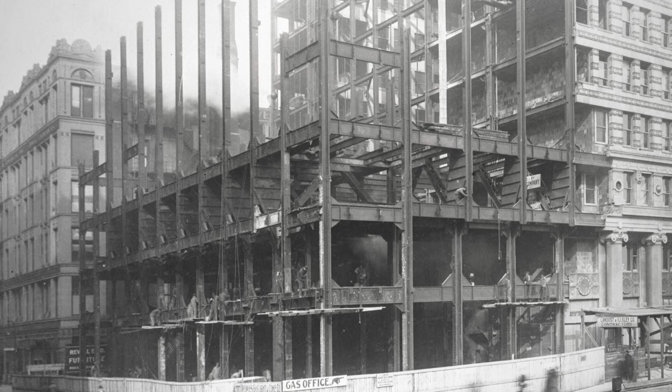The common explanation is simple. They were either lucky or massively overbuilt. But when you look closer at the heavy masonry, the riveted joints, the redundant steel frames, something far more ingenious emerges. A forgotten secret baked into every beam and rivet by builders who had no seismic codes, no computer models, and no shake tables, only instinct. And that instinct may have outsmarted a century of modern optimization.

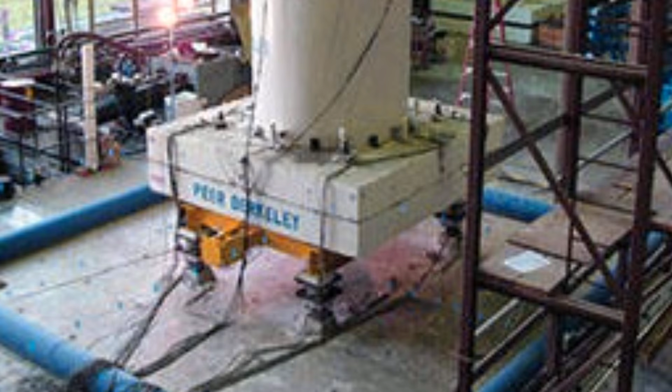In the days after the 1906 San Francisco earthquake, newspapers rushed to explain how steel towers like the Call Building had survived when so much of the city lay in ruins. Headlines called them oversized marvels and debated whether their survival was pure luck or the result of extravagant overbuilding. The press painted a picture of buildings so stuffed with steel and brick that they simply refused to fall, as if brute force alone had saved them.

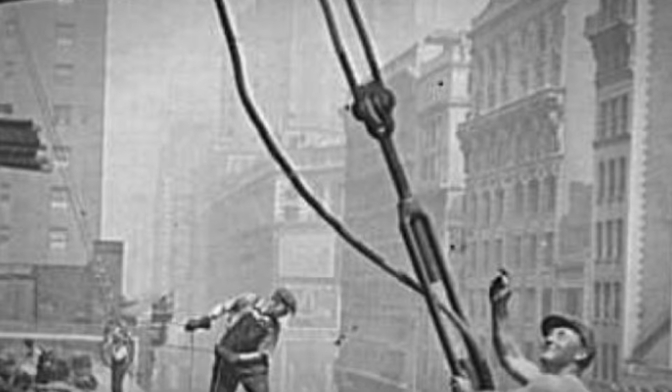Critics like John B. Hayward, a respected engineer of the era, pushed back. In a widely read column, Hayward questioned the wisdom of surrounding steel frames with what he called excessive masonry, warning that such extravagance might be more about show than safety. He argued that construction budgets were swollen by material that did little to guarantee survival. The public, caught between awe and skepticism, wondered if these towers had simply gotten lucky.

But beneath the headlines and heated debates, something more subtle was happening. Builders of the time worked without seismic codes, shake table tests, or even a clear understanding of how earthquakes truly affected tall structures. Their work was guided by observation, experience, and a kind of engineering instinct, an instinct shaped by the disasters and near misses that came before.

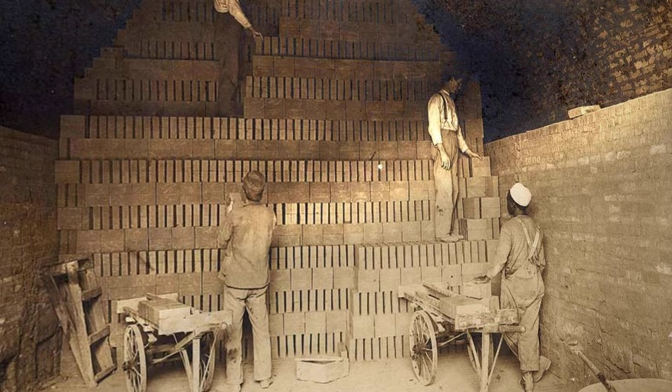Massive steel frames, thick masonry cladding, and deeply rooted foundations were not calculated for earthquakes in the modern sense. They were the product of a mindset that valued patience, excess, and a respect for forces no one could fully measure. This approach, criticized as wasteful by some, ended up providing hidden resilience.

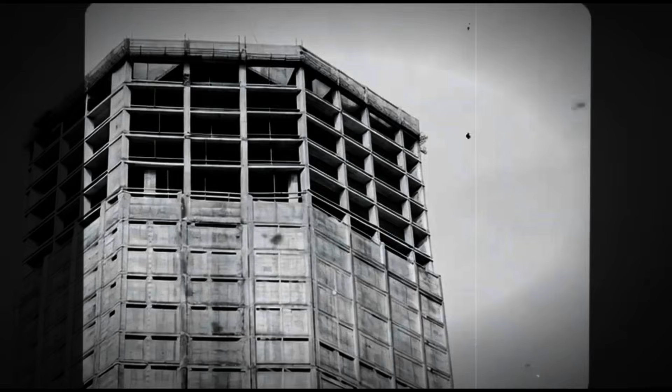The story of these early skyscrapers is not a simple tale of luck or reckless overbuilding. It is a story of builders who, lacking precise science, built with a margin for the unknown. Their choices, often questioned at the time, left behind structures that outlasted the odds. Looking up at these old steel-framed towers today, it's worth asking whether their survival was really an accident, or whether the secret lies in a kind of wisdom that modern engineering sometimes forgets. This wisdom remains a lesson for today.

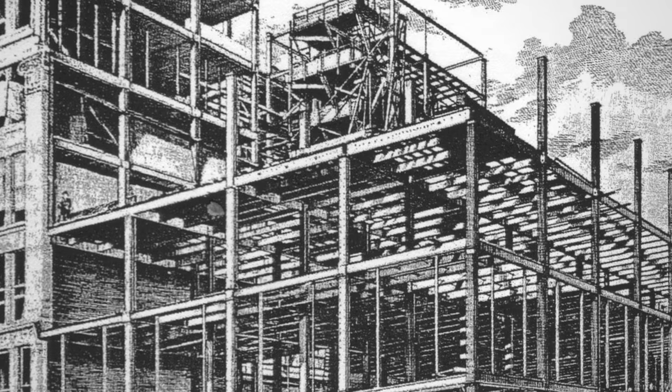Chicago in the 1880s was a city in a hurry, its skyline rising almost as fast as its ambitions. Into this whirlwind stepped William LeBaron Jenney, an engineer with a head full of sketches and a belief that steel could lift a building skyward without weighing it down. In 1885, his Home Insurance Building became the first true metal skeleton, a 10-story experiment that combined rolled steel columns and beams into a frame that carried all the weight, freeing the walls to become mere curtains.

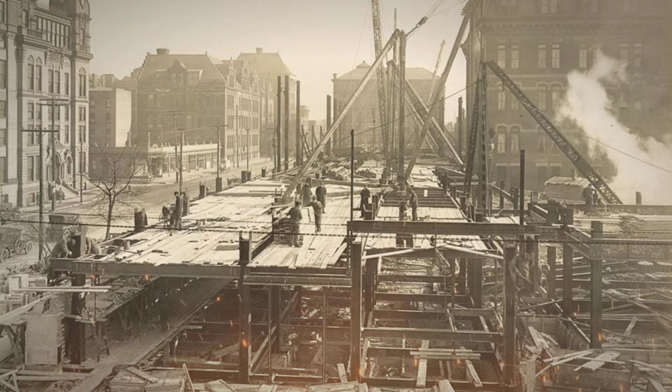Jenney's design notebooks from those years are filled with calculations and rough diagrams, but what stands out is the confidence to try something no one else had dared. The appetite for height caught fire. By the turn of the century, San Francisco was racing to catch up, determined not to be outdone by the Midwest. Between 1898 and 1902, the city saw more than 30 steel-framed projects break ground, each taller and more daring than the last. The rivalry wasn't just about civic pride. It was about who could master the new material, who could build faster, higher, and with more flair.

Every new tower was a gamble. No seismic codes, no wind load formulas. Just the judgment of engineers and the lessons of past failures. Construction moved at a pace that would be unthinkable today. Crews worked around the clock, hoisting beams into place with steam-powered derricks, riveting connections by hand, and wrapping the frames in thick layers of brick or terracotta. The cost of steel and labor soared, but so did the demand for ever taller office blocks and hotels.

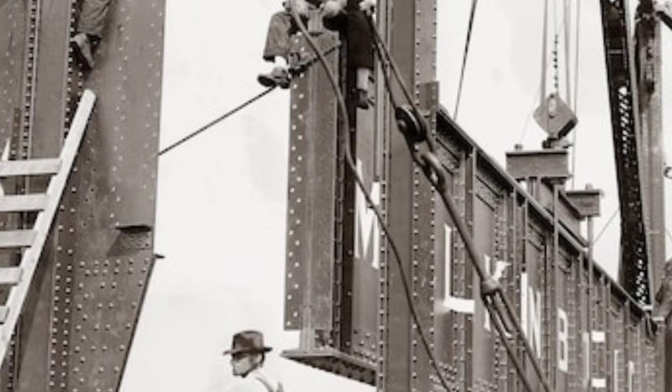Material choices were shaped as much by economic cycles as by engineering logic. When steel prices dipped, frames grew heavier. When budgets tightened, corners were cut. Yet even in this fevered environment, builders tended to err on the side of excess. Without formal codes to guide them, they relied on overbuilding, sometimes out of caution, sometimes out of showmanship. The result was a skyline that was both a monument to optimism and a laboratory for structural ideas that would take decades to fully understand.

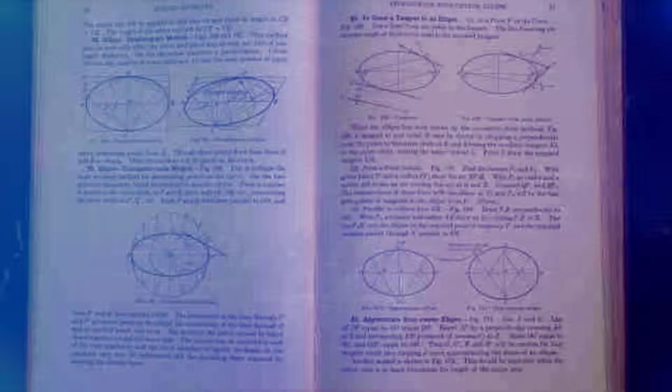Manuals from the 1890s offered little guidance for earthquakes. Calculations for wind and gravity loads filled the pages, but seismic forces were left to the imagination. Engineers in Chicago and San Francisco worked in a world where the only certainty was uncertainty. There were no formulas to follow, no tables to consult, and no building code to enforce minimum safety against shaking.

The first seismic ordinance in the United States did not appear until 1908 in San Francisco, 2 years after the city's devastating quake. Even then, the code was a single paragraph, requiring only a rough estimate of lateral force based on building weight. It would be another 23 years before the first large-scale shake table experiments at Berkeley in 1931 provided any kind of scientific feedback on how steel frames actually behaved during an earthquake.

In practice, every decision came down to experience and a kind of professional instinct. The people who built these towers had only their eyes, their hands, and the lessons of the past to guide them. Iron workers listened for the right ring of a rivet head. Foremen watched for hairline cracks in fresh brickwork after minor tremors. If a building settled unevenly, they recorded it in field notes and tried something different on the next project.

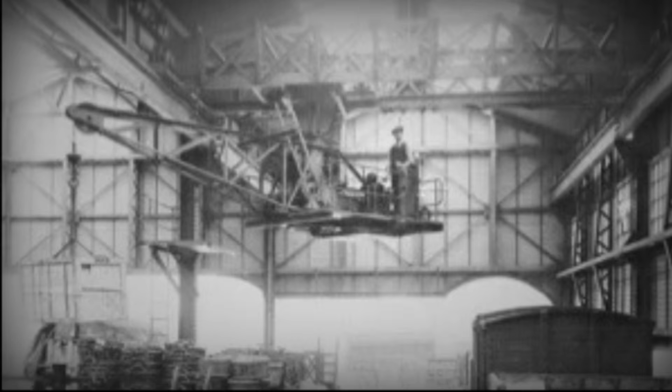The absence of formal standards meant that each engineer became his own authority, drawing on a blend of caution and bravado. Some responded to uncertainty by adding more steel, more masonry, or deeper foundations than the numbers strictly required. Others trusted the skill of their crews to improvise solutions on the fly.

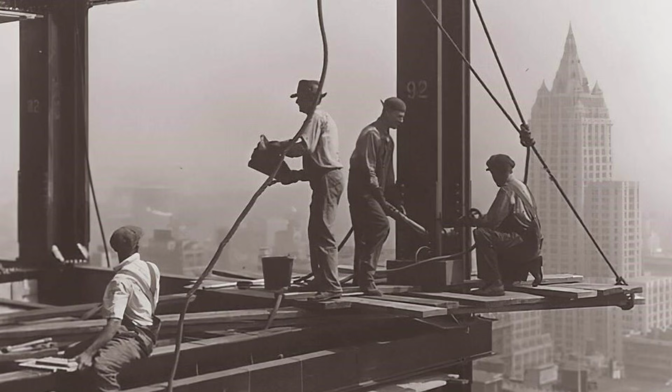This era of guesswork and overbuilding may seem reckless by modern standards, but it produced structures with a built-in margin for the unknown. The resilience of early skyscrapers was not the result of precise calculation, but of a mindset that accepted what could not be measured. Only later would science catch up, codifying what builders had learned by feel. Looking back, it is clear that the survival of these towers was less about luck and more about a quiet, persistent respect for forces no one could fully predict.

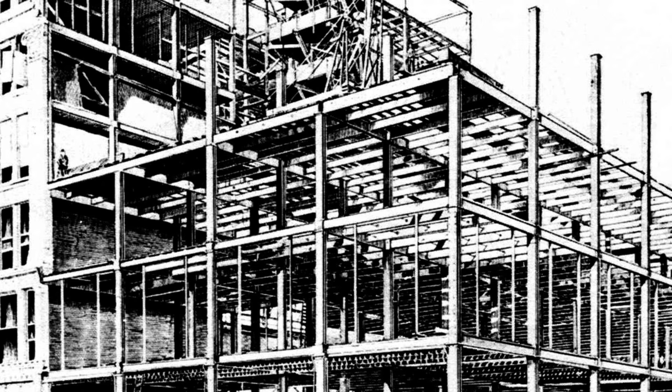23 cubic feet of limestone per floor: by modern standards, that sounds like extravagance. Yet for the builders who wrapped Chicago's and San Francisco's earliest steel skeletons in thick layers of stone and brick, this was simply how things were done. The heavy cladding, often ridiculed as unnecessary weight, played a role few at the time could have articulated. It acted as a kind of silent partner in the building's survival during an earthquake.

Masonry cladding was not chosen for its seismic performance. Fireproofing and civic pride drove the decision. Stone and brick gave these new towers a sense of permanence and grandeur that steel alone could not provide. But when the ground shook, that very mass became an unexpected asset. The thick walls, anchored to the steel frame with flexible shelf angles and iron ties, moved just out of phase with the skeleton behind them.

As the quake's energy raced through the city, the masonry lagged slightly behind the steel, absorbing and diffusing the shock. Each brick and stone, tightly packed yet able to slide microscopically, helped to dampen the building's sway. This was not the brittle, monolithic masonry of old. Instead, it was a layered system, steel for strength, masonry for mass, joined together by fastenings that allowed just enough give.

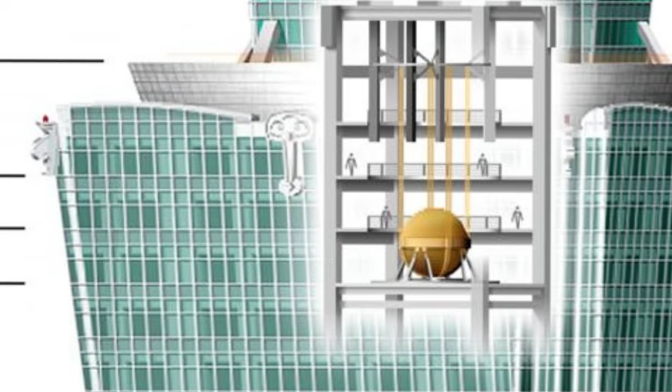Contemporary ledgers for the Call Building and Mutual Savings Bank record staggering quantities of cladding, 30 cubic feet of brick per floor, 2 million pounds of granite and terracotta on the Board of Trade. These numbers, dismissed as architectural showmanship by critics like John B. Hayward, now reveal a hidden logic. The inertia of the cladding increased the building's response time to violent shaking. Laboratory tests a century later would confirm what builders only sensed.

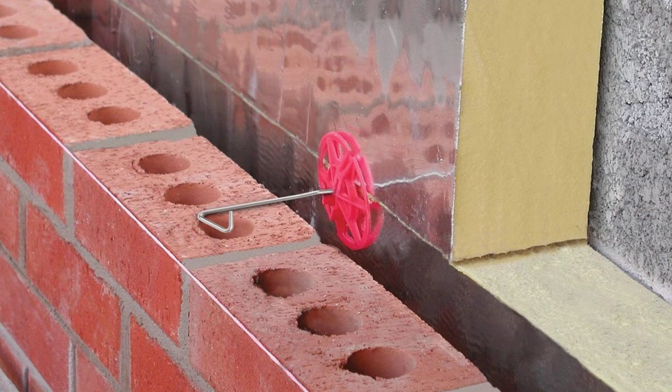When properly anchored, heavy masonry acts as a damper, bleeding off energy that might otherwise tear the frame apart. The method of attachment mattered just as much as the material. Iron shelf angles bolted to the steel beams supported the weight of the stone and allowed it to move independently in small increments. Flexible ties, often spaced every few feet, kept the veneer from peeling away but did not force it to act as a rigid shell.

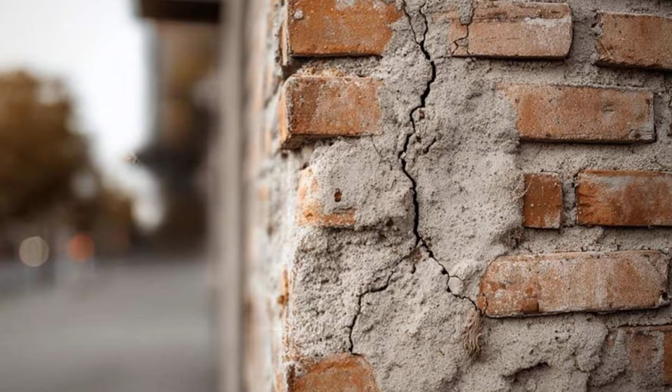This subtle separation allowed the facade to crack and absorb energy without transmitting the full force of the quake to the skeleton inside. Period manuals describe the practice as a way to relieve settlement stresses, but in practice, it introduced a form of controlled flexibility that modern engineers would later recognize as essential for seismic damping.

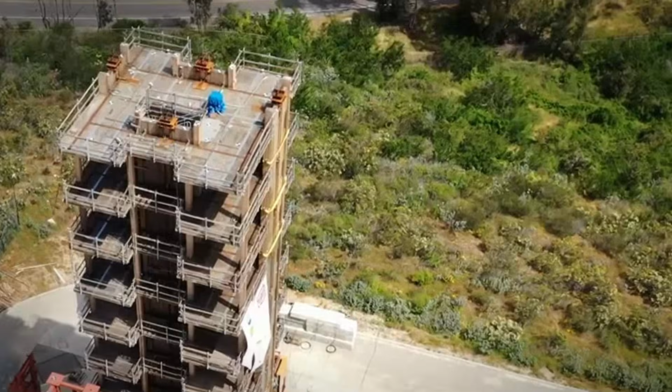The concept of damping, reducing the amplitude of vibration, was not part of the engineering vocabulary in 1906. Yet the combination of mass and movement in these early towers achieved exactly that. The cladding's inertia, coupled with its flexible fastening, created a first line of defense against unpredictable forces. Modern seismic design now uses tuned mass dampers, pendulums, and viscous couplings to accomplish what those early builders achieved with limestone and brick.

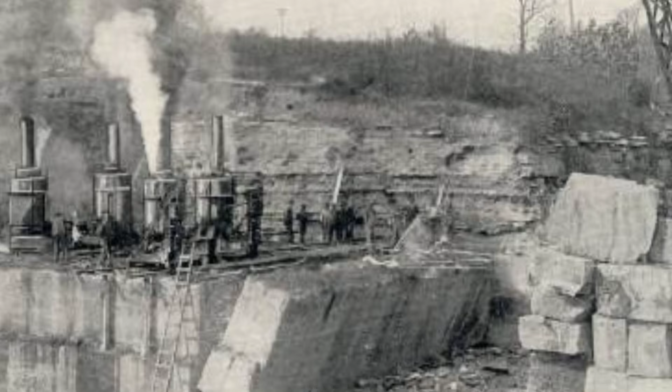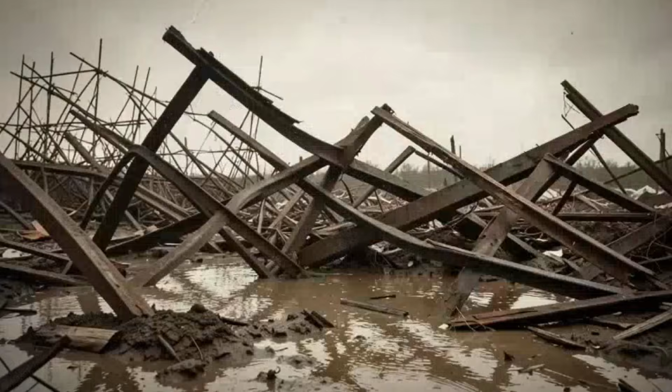Their survival reminds us that sometimes what seems like overbuilding is really an unspoken respect for the unknown, expressed in stone, steel, and the patient craft of those who refuse to take chances with the forces they could not see.

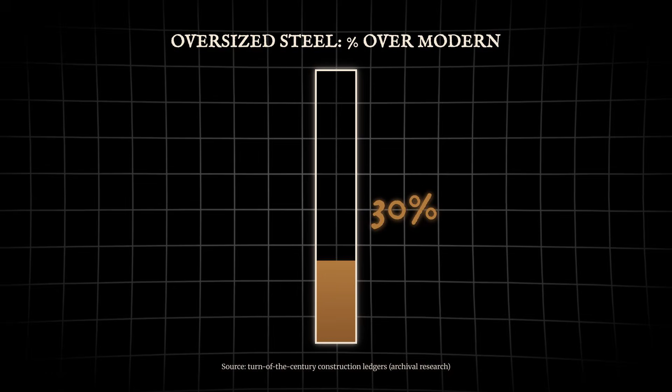Steel was the currency of confidence in the early age of skyscrapers. When George A. Fuller's company took on the Call building in San Francisco, they ordered more than 11,200 tons of steel for a structure that, by modern standards, could have stood with nearly a third less. This was not an isolated case. Across Chicago and the West Coast, ledgers from the turn of the century show steel frames routinely oversized by 30% or more compared to what today's codes would require.

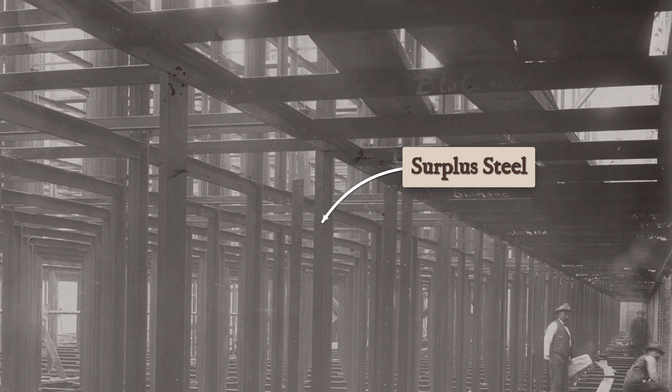At first glance, this seems like architectural bravado or financial waste, a race to outbuild rivals with sheer mass. But the numbers tell a subtler story. Within each floor of the Call building, a dense lattice of beams and columns formed a continuous grid. The pattern was not just for show. Every joint, every splice, every redundant member created a safety net.

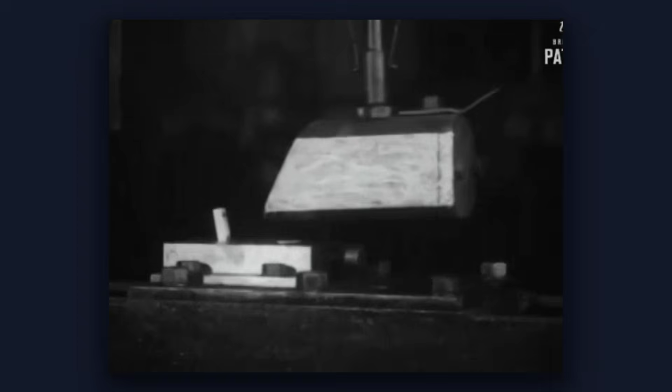If a column or beam gave way, whether from fire, earthquake, or human error, the surrounding frame could reroute the load through alternate paths. Modern engineers call this redundancy. In practice, it meant that no single failure could bring the whole tower down. Fuller's own construction memos, saved in company archives, reveal a philosophy rooted in caution. He wrote that the cost of redundancy is far less than the cost of failure. His teams designed for the unexpected, not just the expected.

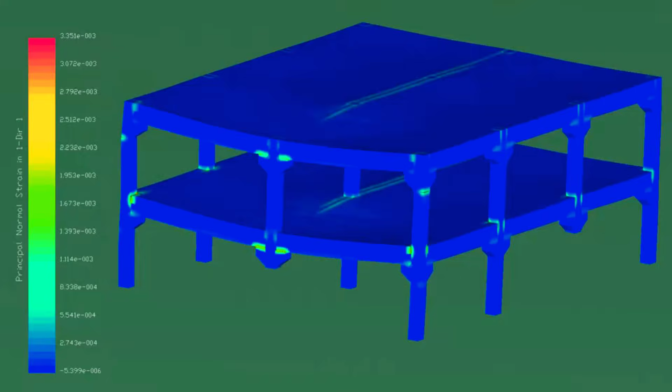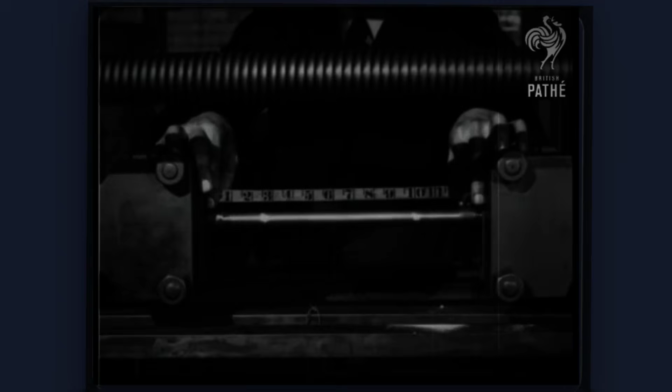In retrospect, this mindset created buildings that could absorb shocks well beyond their original calculations. Recent drift studies using computer models retrofitted to these old frames confirm what the builders sensed by instinct. When engineers simulated the sudden removal of 25% of non-critical steel members, essentially erasing a quarter of the structure's skeleton, the resulting increase in sway or story drift was only 12%. The frame flexed, but it did not break.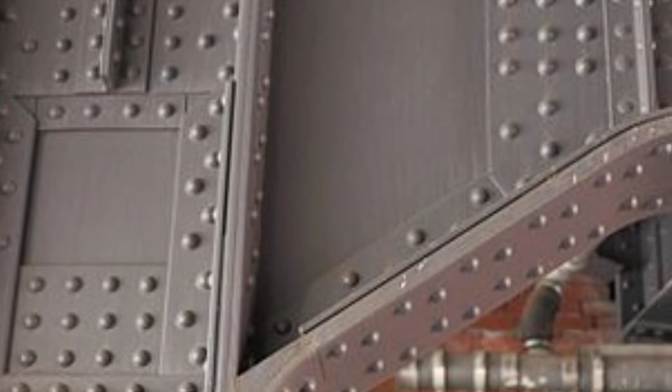For comparison, modern seismic codes allow up to a 3% drift ratio before a building is considered at risk. This means that the early towers, built without seismic science, already surpassed today's standards for ductile performance. The Call building's steelwork was not just heavy, it was interconnected. Redundant framing allowed energy from an earthquake to spread out, dissipating force across hundreds of joints rather than concentrating it at a single weak link.

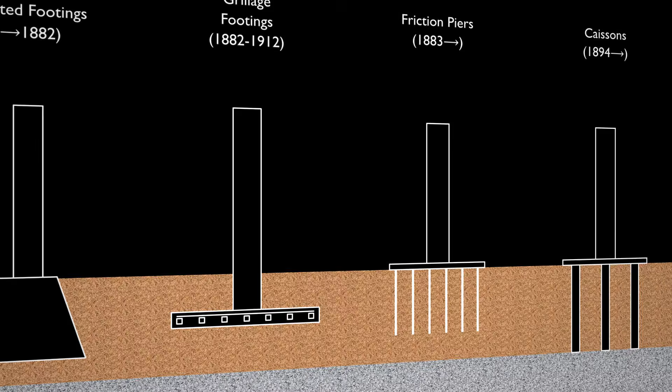In the language of structural engineering, these towers had multiple load paths, routes for gravity and lateral forces to travel safely to the ground, even if part of the network failed. This surplus was not always deliberate. Economic swings, fluctuating steel prices, and the absence of strict codes sometimes drove builders to err on the side of excess. But the result was a kind of accidental genius, frames that could tolerate damage, adapt to shifting loads, and remain standing when less generous designs would not.

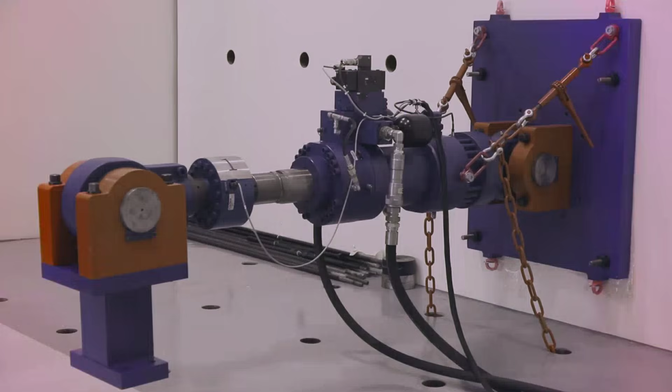Today, when engineers study the performance of these early skyscrapers, they find that the massive redundancy built into their bones is not just a relic of past extravagance. It is a structural safety net, a buffer against the unknown. The survival of these towers is a lesson written in steel.

Sometimes, building more than necessary is the wisest response to forces we cannot fully predict. And when the ground shakes, it is not luck that keeps a building upright, but the quiet strength of surplus and the foresight to expect the unexpected.

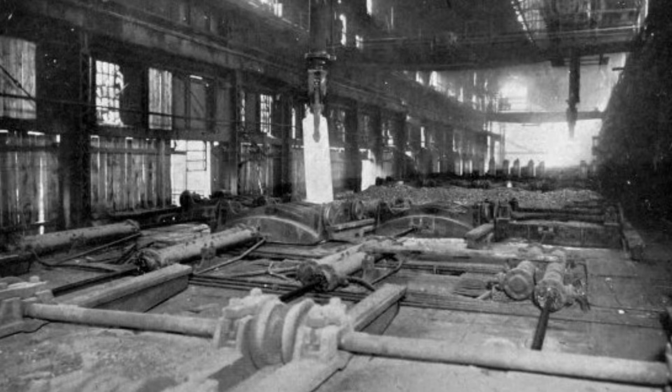Beneath the soaring frames and heavy cladding of early skyscrapers, the real battle for survival played out where steel met earth. In Chicago and San Francisco, soft ground posed a challenge that no amount of overbuilding alone could solve. Bedrock often lay far below the surface, sometimes as deep as 70 feet, while the upper layers were made up of clay, silt, or reclaimed fill that could shift or liquefy under a strong quake.

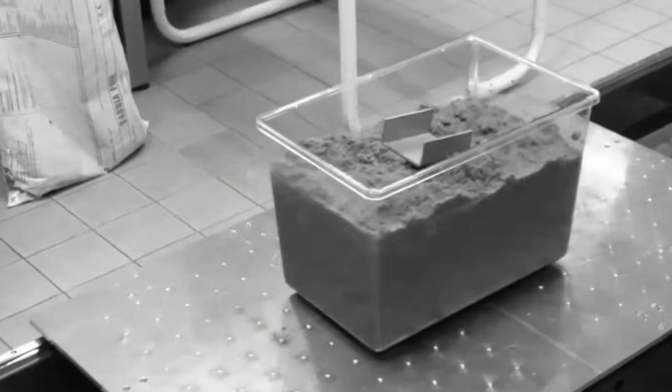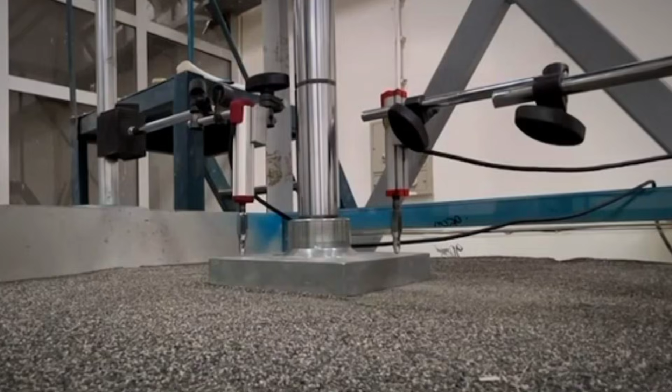Builders turned to foundation systems that were as bold as the towers themselves, blending old-world methods with new experimentation. The Home Insurance Building in Chicago rested on a raft foundation, a thick slab of concrete spanning a grid of timber piles driven deep into the lake bed. This floating mat spread the building's weight over a wide area, allowing it to settle gently into the soft ground rather than tip or sink unevenly.

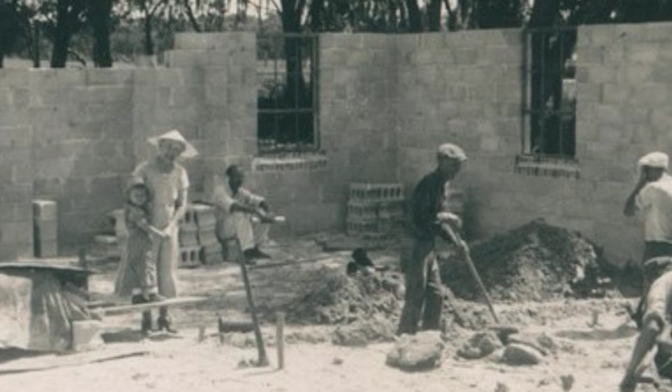Engineers didn't have formulas to predict soil behavior under seismic loading, but they knew from experience that a wide, flexible base could ride out minor shifts without cracking. Field notes from the era describe how crews watched for subtle signs of movement, hairline cracks in the basement, doors that stuck after a rainstorm, and adjusted their methods accordingly. If a building settled too much, the next project would get more piles or a thicker raft.

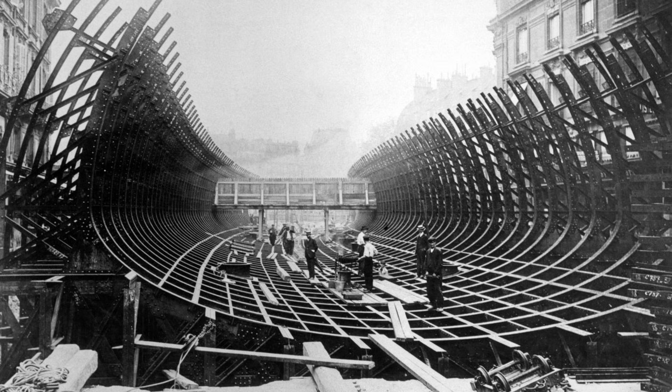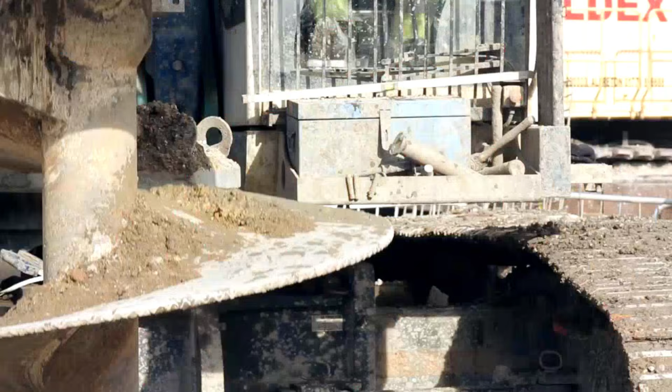San Francisco's engineers faced an even trickier puzzle. The city's downtown sat atop layers of loose sand and clay, prone to sudden liquefaction when shaken. For the Call Building and its piers, builders drove timber piles as deep as 30 feet, then capped them with concrete grillages or caissons. These caissons acted like giant plugs, anchoring the steel skeleton to the most stable soil they could reach. In some cases, the piles extended even further, 70 feet or more, seeking a firm layer that could take the load without shifting.

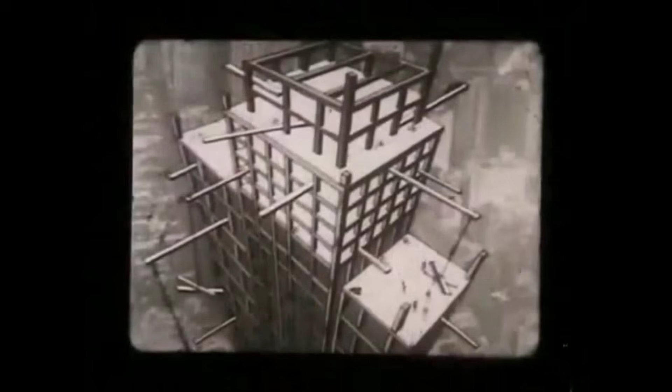The intent was not to create absolute rigidity, but to allow the entire structure to move as a unit if the ground itself gave way. The 1906 earthquake put this approach to the test. While many brick and timber buildings collapsed when their shallow footings failed, the skyscrapers with deep caissons or floating rafts largely survived. The Call Building's foundation, for example, absorbed and distributed the quake's energy, limiting settlement to just a few inches, enough to crack some plaster but not enough to threaten the frame above.

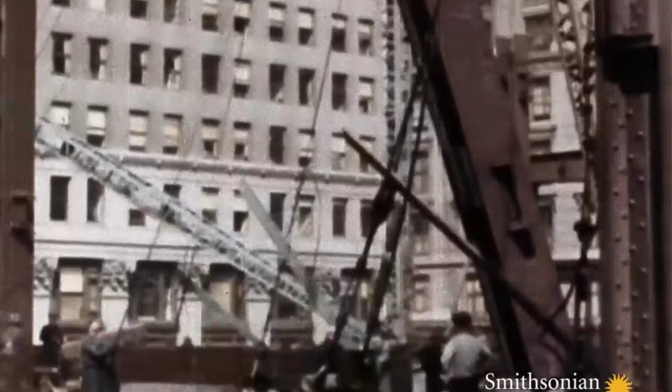Contemporary reports from the California State Engineer noted that these deep footings absorbed the bulk of the shaking without noticeable settlement. This was not luck. It was the result of a philosophy that saw the ground as an unpredictable partner, one to be respected, not ignored. Builders hedged their bets with deep, redundant foundations, even when the cost was high and the science incomplete. They were not chasing efficiency. They were building for uncertainty, guided by the lessons of every structure that had settled, cracked, or failed before.

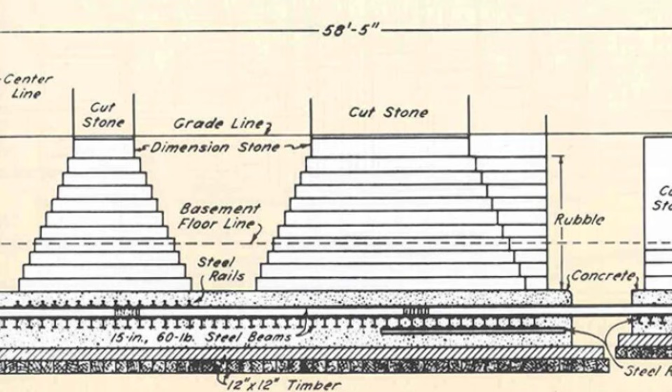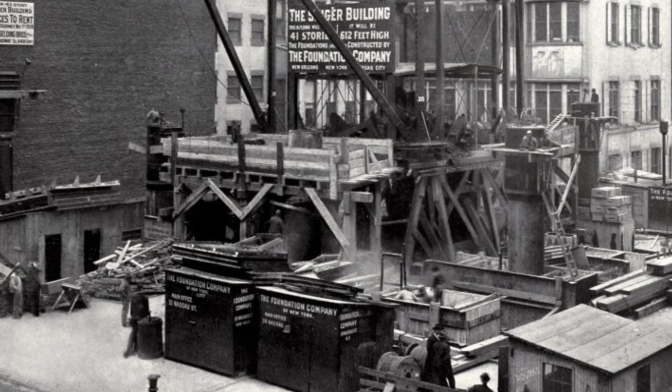The ingenuity of these foundation systems, caissons, rafts, floating slabs, created a silent resilience, allowing the towers above to flex and settle without catastrophic loss. In this way, the secret of early skyscraper survival began not in the steel above, but in the patient, cautious work that vanished beneath the city streets.

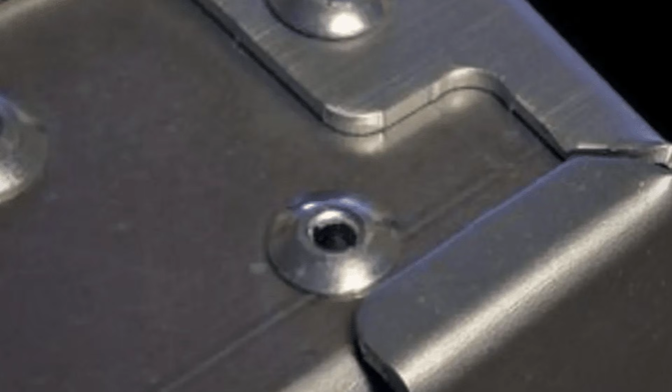Riveted joints, often overlooked in the story of early skyscrapers, performed a subtle but vital role in holding steel frames together. Each rivet began as a glowing steel pin, hammered into a hole deliberately made 2 or 3 millimeters wider than the shank. This tiny gap, almost imperceptible, allowed for a controlled slip, just 0.1 to 0.3 millimeters, before the rivet pressed fully against the steel.

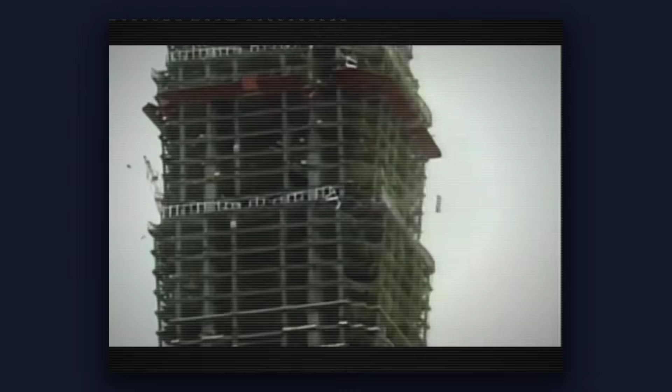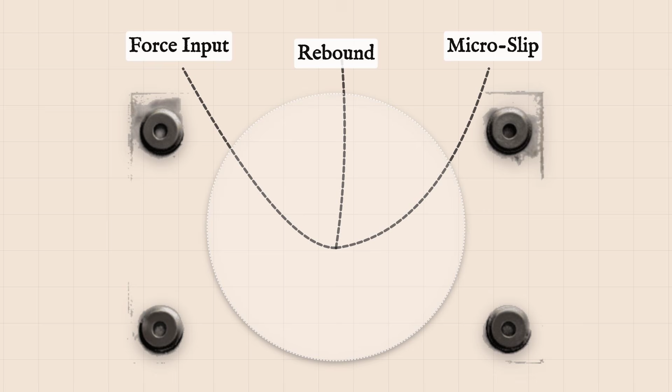In the chaos of an earthquake, these minuscule movements multiplied across thousands of joints, providing a hidden flexibility that let buildings sway without tearing themselves apart. The secret lay in the plastic heads of the rivets. Heated and hammered, the steel shank hardened but remained ductile, able to stretch and deform under stress.

Forensic studies of buildings that survived the 1906 San Francisco earthquake revealed rivet shanks with necking and local shear, clear signs that these connections bent and yielded, but rarely broke. Each rivet acted as a tiny fuse, absorbing shock and dissipating energy before passing the load along.

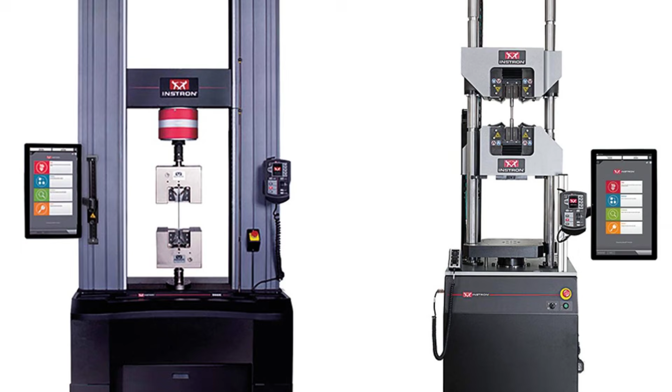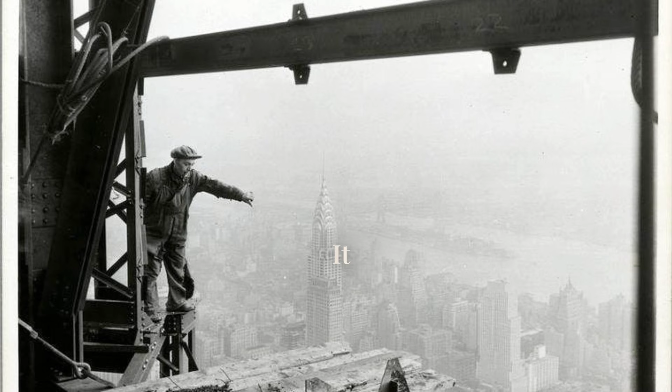Modern tests confirm the strength. A standard 3/4-inch rivet can resist about 3,500 pounds of shear. But the real advantage wasn't brute force. It was the ability to yield, to flex and recover, rather than snap under pressure.

Redundancy was built into every connection. A single splice between beam and column might be held by 20, 30, or even 40 rivets. If a few slipped or yielded, the rest took over, spreading the stress and preventing catastrophic failure.

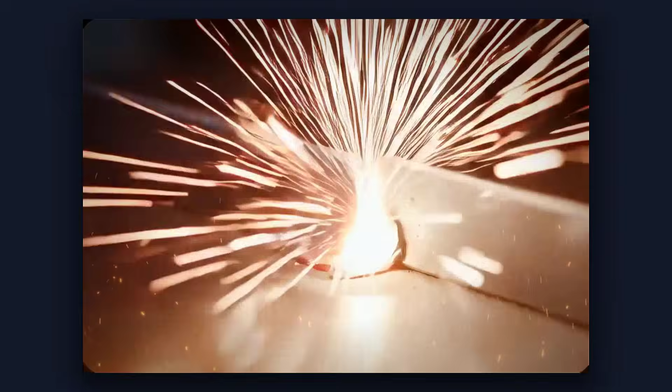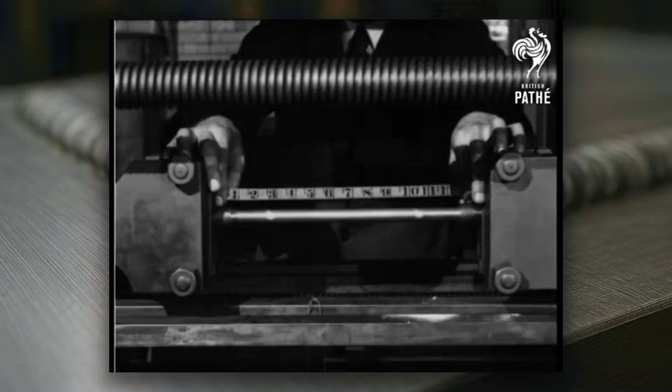Later, when engineers compared these old riveted frames to modern welded or bolted joints, they found a stark difference. Welds and bolts, with their tight tolerances and rigid seams, often failed suddenly under seismic loads. When a welded joint cracks, it does so without warning. Riveted joints, by contrast, yielded in stages, buying precious seconds for the building to ride out the shaking.

Iron workers of the era trusted their instincts. Oral histories from Chicago recall the importance of a rivet that would sing when struck, a clear note that meant the head was seated just right.

Manuals from the 1890s called for oversized holes and careful hammering, not for earthquakes, but to allow for construction tolerances and thermal expansion. Yet this practice created joints that could slip and yield, a feature modern engineers now try to recreate with slip-critical bolts and flexible welds. What looked like old-fashioned craft was, in fact, a sophisticated form of resilience.

The micro-movements of riveted joints, their capacity to slip, yield, and recover, transformed steel skeletons into structures able to survive forces no one could yet measure. This quiet flexibility, born of practical skill and cautious excess, became the hidden fuse that protected early towers from disaster.

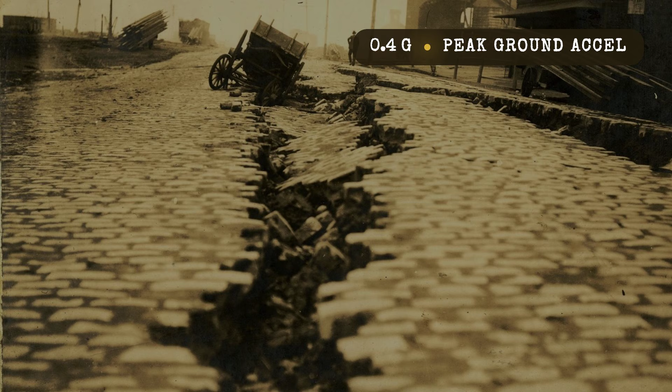At 5:12 a.m. on April 18, 1906, San Francisco was jolted awake by an earthquake that lasted 45 seconds. The ground heaved with a force exceeding 0.4 G, enough to threaten even modern buildings. Entire blocks collapsed or burned, but a few steel-framed towers remained standing.

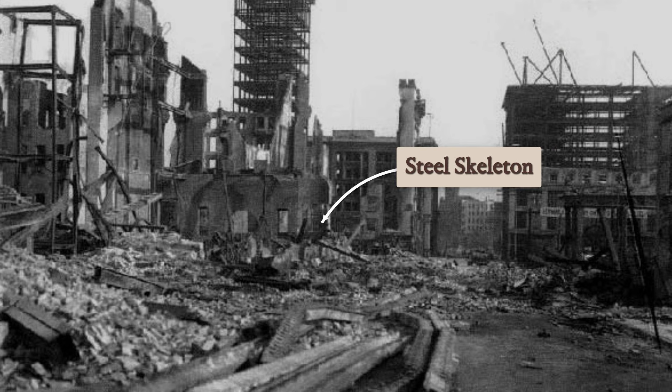The Call Building and Mutual Savings Bank, both in the heart of the fire zone, kept their structural frames intact. Their facades cracked, but the steel skeletons inside held firm, absorbing and redistributing the shock. Just a block away, the Valencia Street Hotel collapsed, killing dozens. Timber warehouses near the waterfront crumpled as their shallow footings failed. The steel towers, considered overbuilt at the time, outlasted their neighbors.

City engineer Eugene Gilmore inspected the ruins and found the Call Building's foundation had settled less than 3 inches, despite unstable fill beneath. All major columns stood plumb. The steel frame flexed but did not break. Gilmore's report listed the survivors: Call, intact; Mutual Savings, intact; Merchants Exchange, minor damage. He wrote that the difference was not luck, but continuous framing and deep footings that allowed the structures to ride out the shaking as a unit.

The Call Building's frame alone carried more than 11,000 tons of steel, with another 2,000 tons of masonry cladding. Every joint was secured by dozens of rivets, each able to yield slightly under stress. When the ground motion peaked, these connections slipped and recovered, dissipating energy that would have shattered more brittle systems.

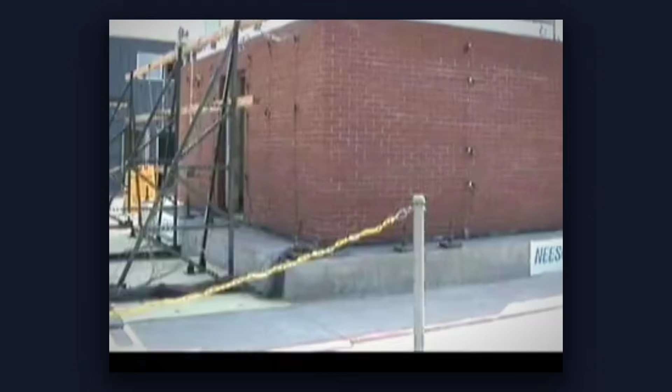Gilmore's field sketches showed bowed columns and shifted beams, but the frame remained locked together. In contrast, the nearby warehouse, built with unreinforced brick and shallow footings, collapsed instantly, its walls unable to flex or absorb the shock.

Those 45 seconds revealed a hidden strength in early skyscraper design. The steel towers survived not because of calculation or code, but because their builders allowed for the unknown. Gilmore's inspection became the first technical proof that what seemed excessive was, in fact, resilience.

Jack O'Leary felt the quake before he saw it, a shiver running through the steel, every rivet ringing out. In a letter to his brother, he described, "The girders moved like reeds in a wind, but the rivets gave way like a breath, never a snap."

For O'Leary and his crew, the work was more than muscle and metal. It was a conversation with the building itself. Each rivet was set by sound, searching for a sharp ping that meant the joint would flex and recover, not break.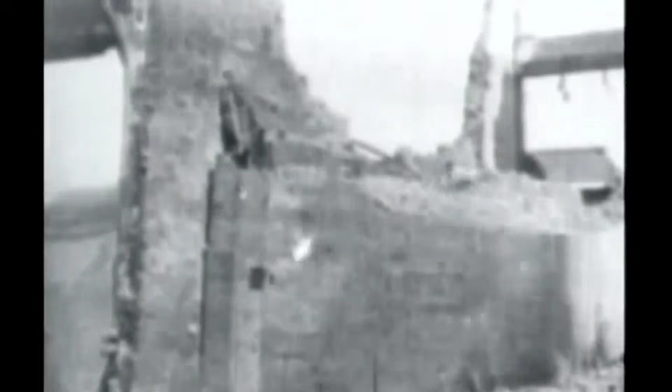That difference, almost invisible, could decide whether a tower stood or fell. On the scaffolds, the earthquake was immediate, a sudden sway, dust drifting from beams, the hush when a column shifted. O'Leary's 12-man crew paused after every aftershock, eyes on the rivet lines, listening for trouble. He wrote, "We trusted the steel, but we trusted each other more. If one man heard a crack, we all listened." The sense of responsibility was personal.

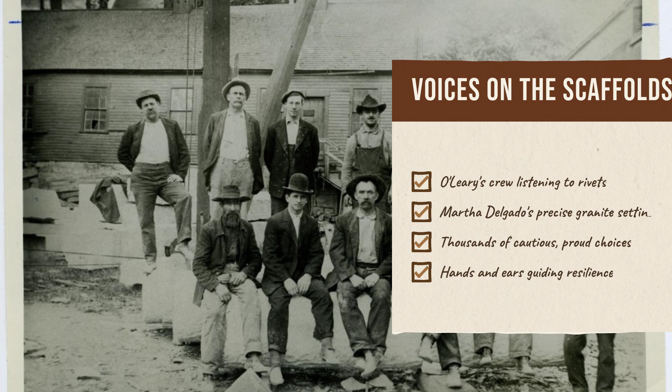The tower's fate depended on thousands of choices, each made with a mix of caution, pride, and respect for what they couldn't control. Martha Delgado, a mason at the Fairmont Hotel, learned from her father how to set granite so it would flex, not fracture. She described laying interlocking joints, each stone set to give a little, just enough so the building could dance on the mud.

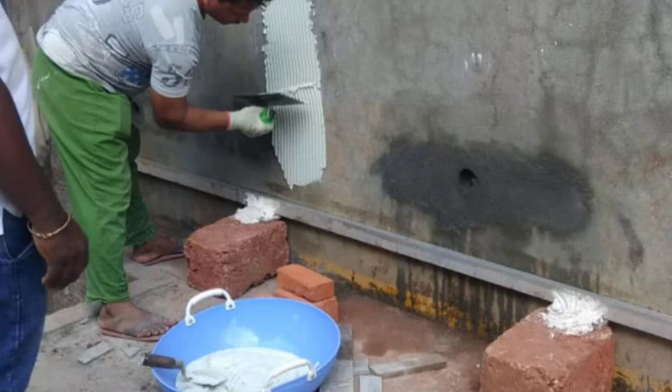In oral histories, Delgado spoke of finding her place on an all-male crew, insisting on careful spacing between granite panels, a hair's breadth that let the facade move with the earth. Her technique became a quiet insurance policy, a way to let the building breathe.

Stories like these, saved in letters and family lore, reveal a different kind of engineering, one that lived in the hands and instincts of those who built these towers. The resilience of early skyscrapers was as much about patience and craft as it was about steel and stone. When the ground shook, it was these invisible choices that let the towers endure.

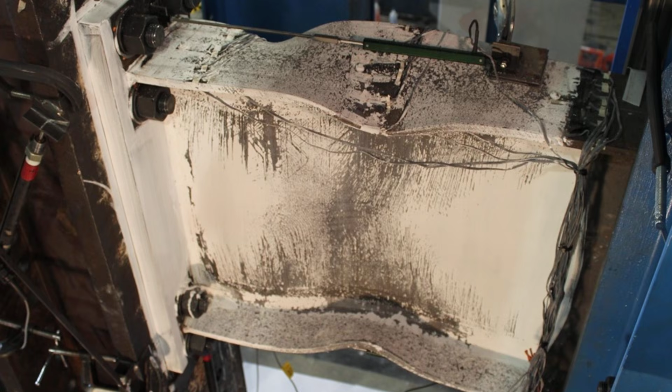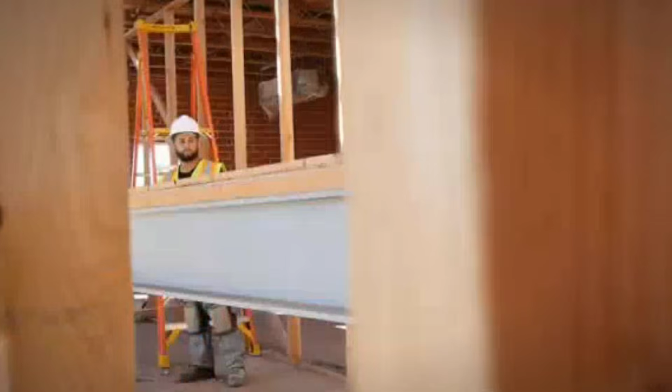Modern engineering promised efficiency, but the results have sometimes been less than reassuring. In the aftermath of the 1994 Northridge earthquake, inspectors found that dozens of supposedly state-of-the-art steel moment frames in Los Angeles had cracked or failed. These were not century-old towers overloaded with masonry and redundancy. They were lean, optimized structures designed to meet the letter of the code with as little material as possible.

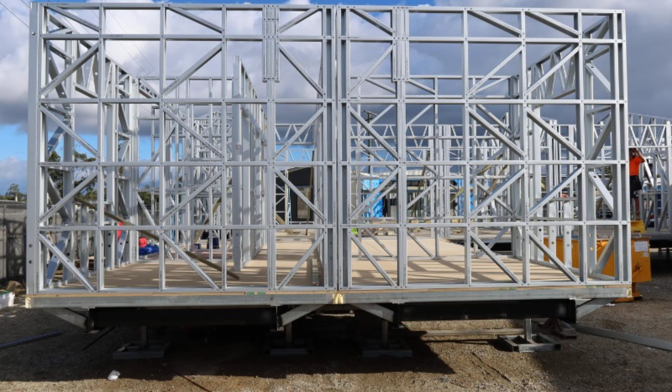Engineers had trimmed away what they saw as excess, using up to 30% less steel than their early 20th century counterparts. The logic was simple: lighter frames, lighter costs, same safety. But when the shaking started, the frames proved brittle, their welded joints snapping without warning. Curtain wall systems, prized for their sleek profiles and minimal structure, offered little resistance to lateral forces.

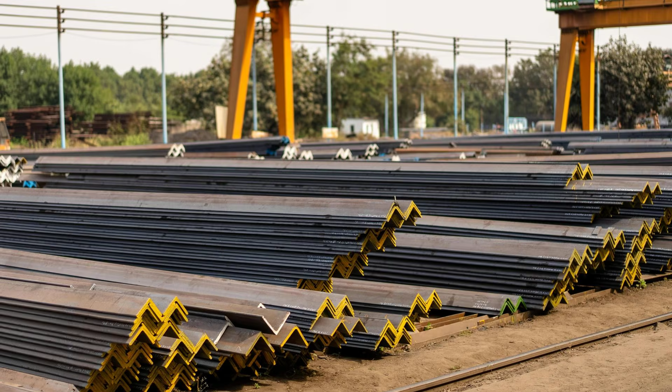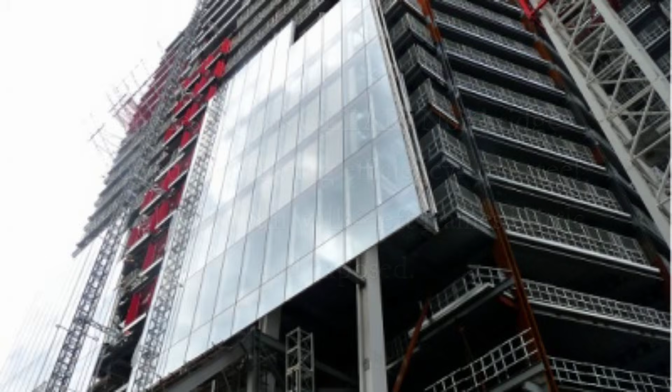The damage was so widespread that entire buildings had to be evacuated, and the U.S. Bank Tower, an icon of modern design, became a case study in the risks of chasing material efficiency over resilience. The irony was hard to miss. While the old giants stood on their surplus, the new towers, stripped to their minimums, showed how easily efficiency can become fragility. The lesson was clear. The margin for the unknown, once built in by instinct, cannot be wished away by calculation alone.

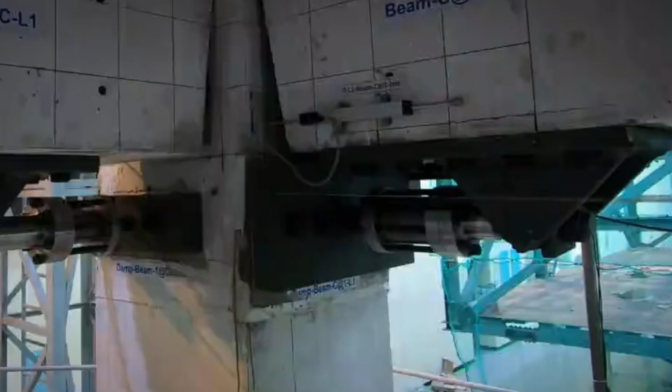Modern seismic codes carry the fingerprints of the riveted era, even if most engineers no longer swing a hammer at red-hot steel. Provisions like ASCE 7-16's slip-critical connection requirement, mandating that bolted joints allow for controlled micro-movement before full bearing, echo the old practice of oversized rivet holes. This clause is not just about strength. It is about letting a joint yield and absorb energy, just as riveted frames once did.

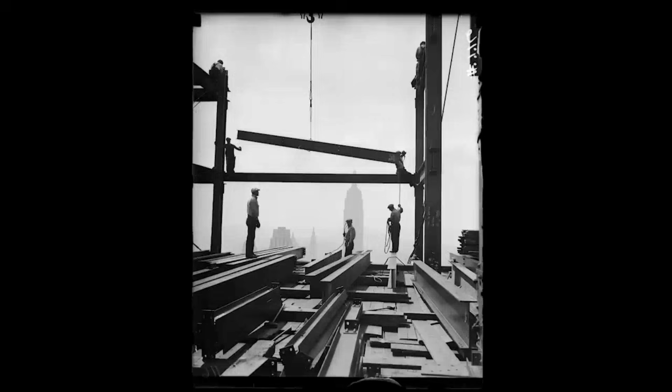In the same codebook, redundancy is no afterthought. The AISC 360-16 specification carves out entire categories for structures with multiple load paths, demanding that no single failure can bring down a frame. These rules, spelled out in technical language, are the scientific heirs to a philosophy that once relied on extra steel and a craftsman's ear for the right ring of metal.

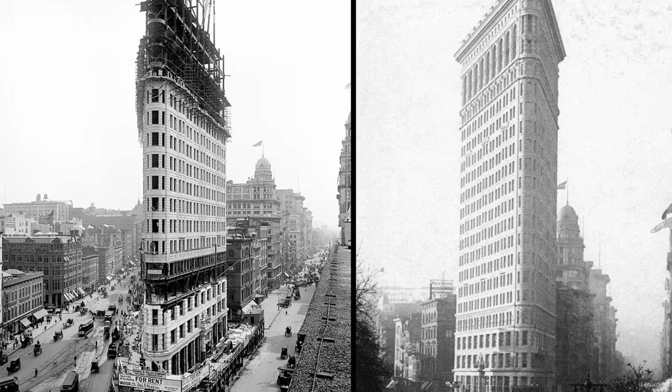Hybrid joint research now explores connections that blend the slip of rivets with the strength of high-tension bolts, a deliberate nod to the accidental genius of the past. Each new clause in the code is a quiet tribute to lessons learned from towers that flexed and survived. The continuum is clear. What began as instinct and overbuilding has become codified resilience, ensuring that the wisdom of early builders is never truly forgotten.

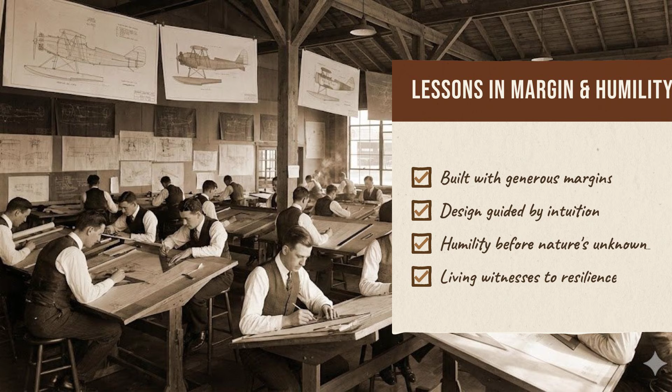Today, every steel-frame skyscraper that still stands from that era is a testament not to luck, but to a mindset that valued margin, intuition, and humility before nature's unknowns. As modern engineering increasingly optimizes for efficiency, the old towers remind us, sometimes, survival comes from honoring what we can't fully predict. Their resilience is not just history, it's a silent challenge for every structure we build today. Next time you pass one, consider what it truly survived.